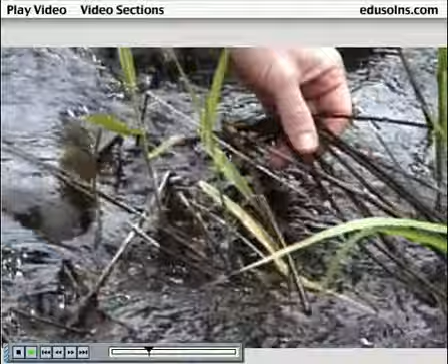Aquatic systems are impacted by inputs from their surroundings. For example, as a forest goes through its annual cycle, it can affect the stream environment by contributing water from storm runoff and spring thaw, soil from erosion during storms, and organic matter from decaying plants, animal excrement, and dead animals. Small amounts of organic matter are healthy for the stream and supply nutrients for primary growth in the stream. These nutrients are the basis for most food chains in an aquatic system.

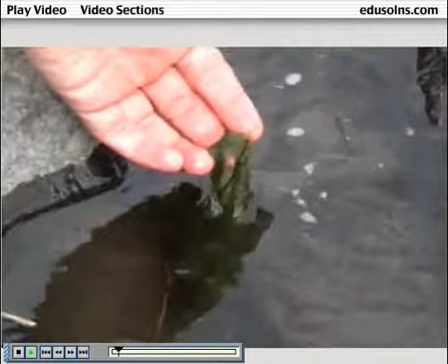When nutrient levels in a stream reach a certain level, growth forms on rocks and tends to make them slimy. In this process, nature is taking dissolved organic matter from the water and turning it into particulate or solid organic matter in the form of bacterial, algal, and fungal cells.

This is the same natural process that we use in sewage treatment plants to process our common household waste. The problem is that if we directly release our sewage waste into streams and rivers, it causes two problems. First, the organic matter is at such a high level that it overwhelms the natural removal processes in the stream. Second, disease organisms present in our waste are transmitted to other users downstream from our sewage release.

Before we can completely understand sewage treatment, we must define a few terms and see how the effectiveness of the sewage treatment plant is measured. Every sewage treatment plant measures several chemical parameters of what comes into the plant, referred to as the influent, and what leaves the plant, referred to as its effluent.

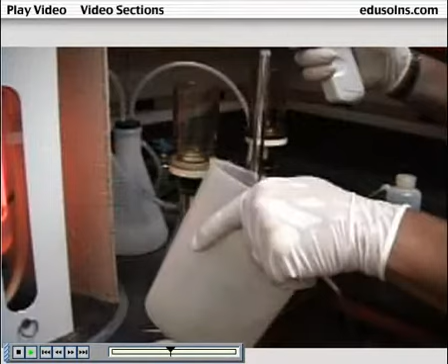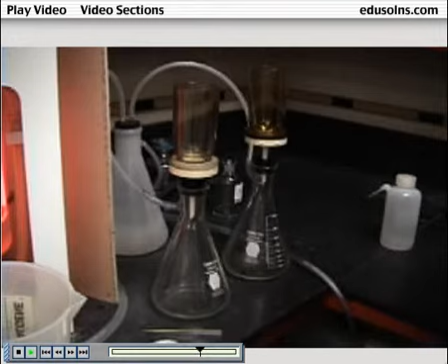From the standpoint of day-to-day operations, it's important to know how much waste is entering the plant. This information helps the plant operator keep the plant operating at its maximum efficiency. From a regulation standpoint, it is important to know how well the treatment plant has removed the organic and bacterial waste. Examples of these chemical measurements include a solids determination, a biochemical oxygen demand test, and a fecal coliform test.

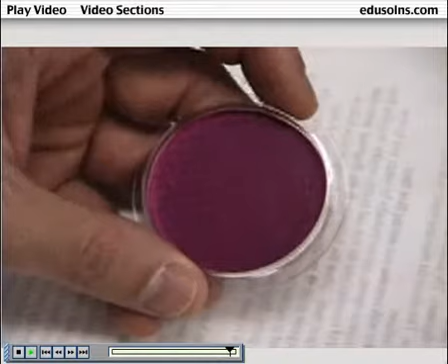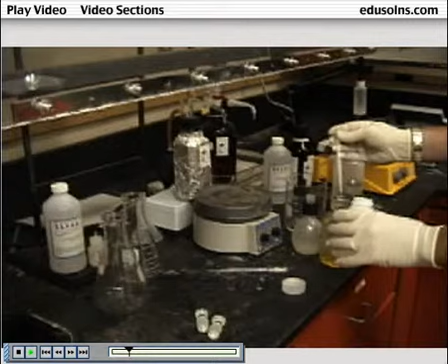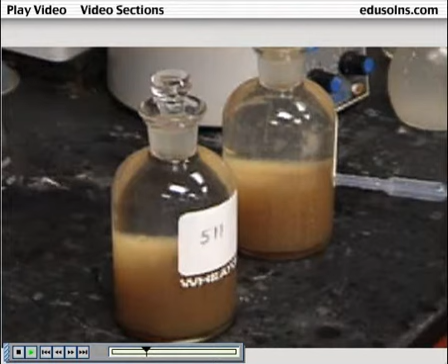One of the most important chemical measurements is the dissolved oxygen concentration. Air-breathing animals have the luxury of having approximately 20% oxygen in the atmosphere. But water can only contain about 8 to 10 parts per million depending on the temperature and amount of organic waste in the water. In percentage terms, water only contains about 0.001%, which is incredibly small as compared to our 20% from the atmosphere.

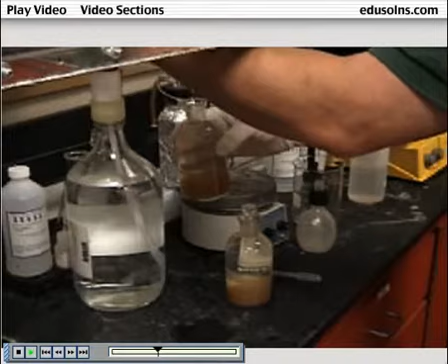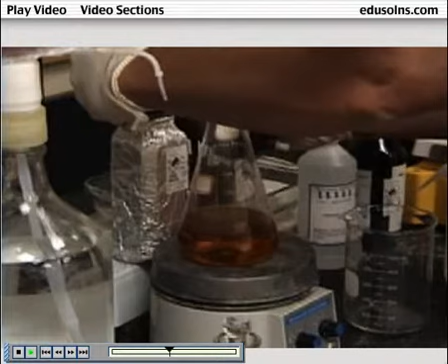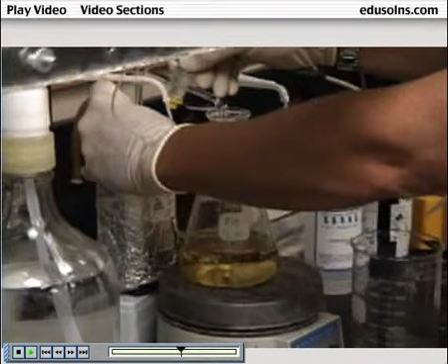When organic waste is released into a water system, microbes in the water use the dissolved oxygen to oxidize the organic waste. You can see that when there are only 10 parts per million oxygen in the water, all of the oxygen can be rapidly consumed. Thus, the main point of a sewage treatment plant is to remove the organic matter to a level that the stream can handle the waste, such that it does not consume all of the oxygen.

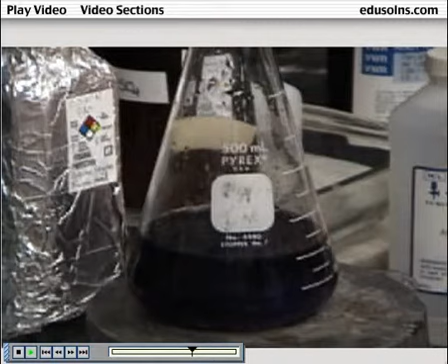This brings us to the term biochemical oxygen demand, referred to as BOD. The BOD is a measure of how much oxygen would be needed by bacteria to completely oxidize the waste. This is determined by placing a small amount of the organic waste in a bottle, measuring the initial dissolved oxygen in the bottle, allowing it to incubate in the dark for 5 days, and measuring the remaining dissolved oxygen. From the initial and final dissolved oxygen measurements, you can calculate the BOD in the waste.

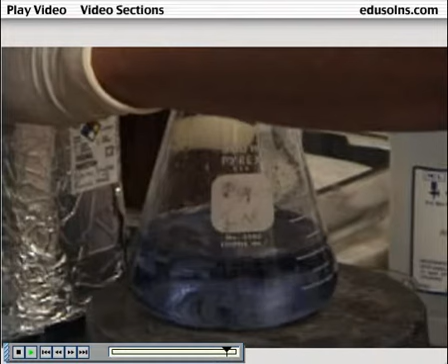Sewage treatment plants measure the influent BOD and the effluent BOD to determine the percent removal or efficiency of the plant. Waste treatment plants vary from city to city, but the basic processes are the same in developed countries. In fact, one prerequisite for being a developed country is to have adequate water and wastewater treatment. These two capabilities are key to fighting disease and providing one's citizens with a healthy environment.

We will illustrate a trickling filter plant and an activated sludge lagoon. First, we will follow the water through the plant. Then we will come back and discuss solids removal.

As you view this video, remember that there are two types of BOD that we are concerned with: BOD in the particulate or solid form, and BOD dissolved in the water. It is also important to note that we remove dissolved BOD by turning it into microbial cells that we can then remove from the water.

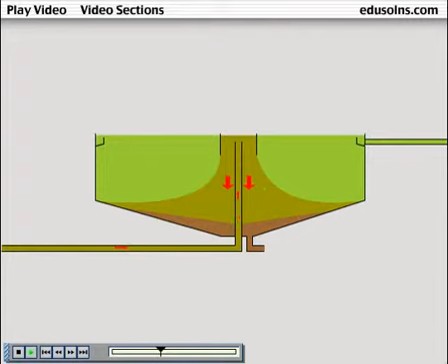Prior to the 1960s, most cities in the United States only performed primary treatment on sewage waste. This basically involved collecting the flow from the sewer into a large tank and letting the solids settle out of the system. The cleaner water flowed over the top of the tank and was released into a nearby stream, but this water still contained approximately 50% of the initial BOD.

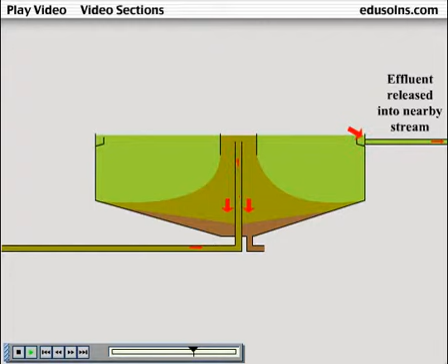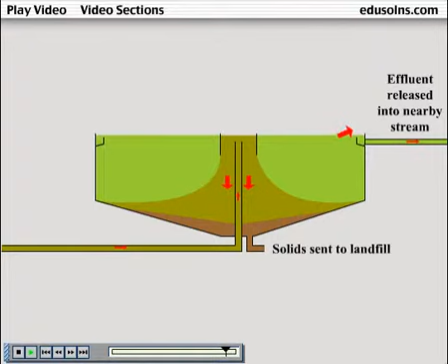Solids collected in the bottom of the tank were disposed of in a landfill. As you can guess, this may have been an inexpensive treatment process, but it was not as effective as we needed and did little to control diseases.

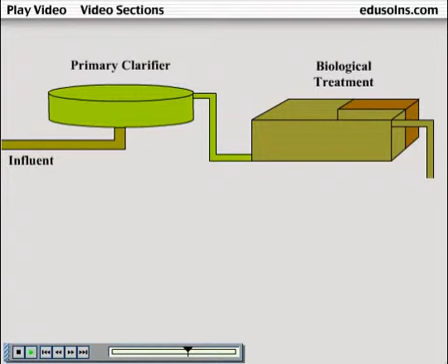In the mid-1960s and 1970s, the federal government started a program to update sewage treatment facilities. This basically involved adding secondary or biological treatment to existing facilities and building completely new facilities for cities without any sewage treatment. After the biological treatment process, another settling tank was added and a chlorination step was added to kill any pathogenic organisms still present in the waste.

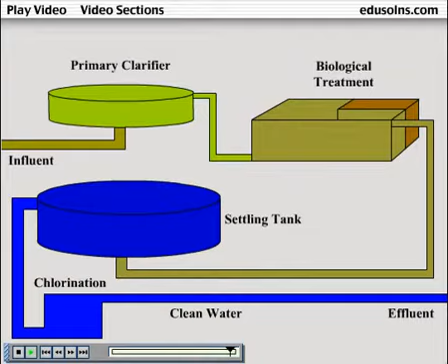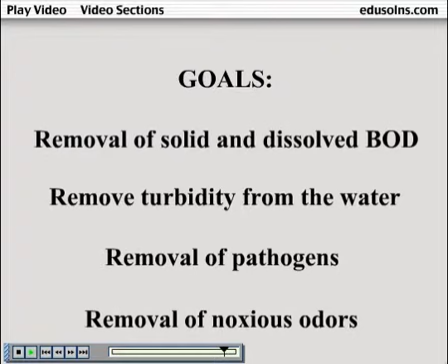This brings us to the major goals of sewage treatment. These goals include the removal of solid waste that can result in BOD to the receiving water. We must also remove any dissolved BOD, since this form of BOD will travel with the water, exit the plant, and result in harm to nearby streams. From a purely visual standpoint, we also want to remove any cloudiness or turbidity from the water. Removal of pathogens is a major goal of the treatment process. And finally, we would like to remove any noxious odors from the waste.

The sewage treatment plant that we will use to illustrate wastewater treatment is located in Walla Walla, Washington. This plant was selected due to its proximity to Whitman College and because of the diversity of treatment processes that the plant has. We will begin our tour by looking at the location of the plant with respect to the city of Walla Walla.

The usual location of municipal treatment plants is downhill from the city. Drinking water plants are usually located uphill from town, which minimizes costs associated with the pumping of treated water. The same economic principles apply to waste treatment plants, which are usually located downhill from the town. This follows the basic principle of water flows downhill.

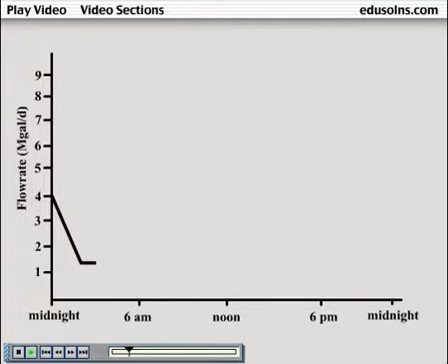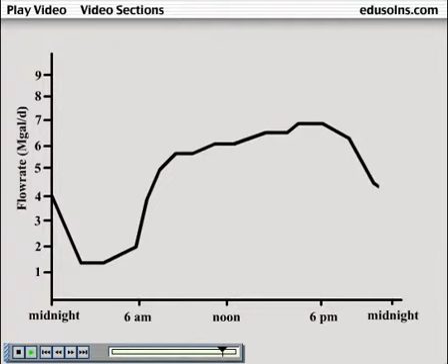Imagine not going to the bathroom or taking a shower for a day. Or imagine not being allowed to go to the bathroom on holiday, or after 5 o'clock in the afternoon. Our point here is the water treatment plants and the sewage treatment plants must operate 24 hours a day, 7 days a week, and 365 days a year. No exceptions. Some systems are automated today, but still the treatment process must continue, uninterrupted. So when you get up in the night to relieve yourself, remember, someone is hard at work at the treatment plant. The figure here shows the daily cycle of water use in a typical city.

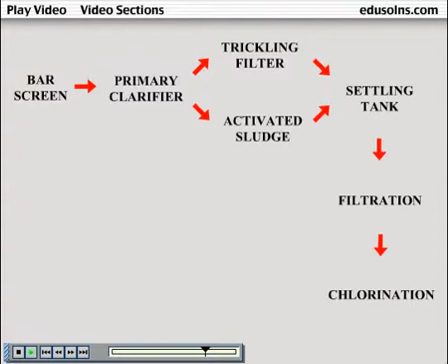Now with this background, we will finally illustrate and describe the basic components of a sewage treatment plant. As we do this, keep two points in mind. First, we will describe one basic system, but will show two different biological treatment processes. Seldom does one treatment plant have both biological treatment processes. Second, we will first follow the flow of water through the treatment plant, then we will come back to the inlet of the plant and explain what happens to the solids entering the plant.

Water enters the plant through a bar screen that removes large objects that may have inadvertently entered the system. These objects would damage pumps and other components of the treatment plant and would likely clog pipes if they were not removed.

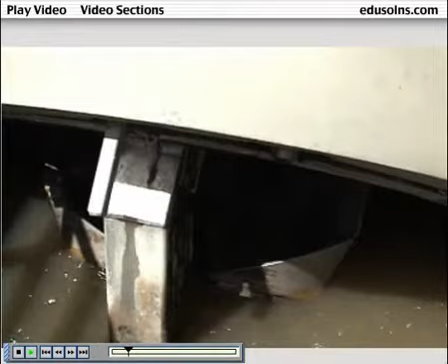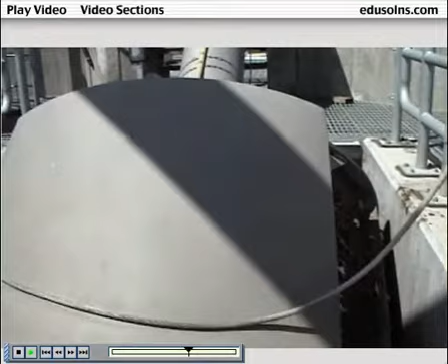Next, the wastewater passes through a microscreen which removes additional large solids such as plastics, cigarette butts, and other solids that will not biodegrade in the treatment plant, but could also damage pumps or clog smaller pipes in the system. Periodically, the microscreen cycles through a cleaning stage which removes solids from the filter. Some treatment plants have an additional comminutor which grinds the solids into smaller pieces. An example of these solids is shown here. These solids do not enter the plant any further, but are disposed of in a sanitary landfill.

After larger solids that could damage the system have been removed, the wastewater flows into a settling tank, referred to as a primary or preliminary clarifier. It is important to remember that BOD enters the plant as solids, which are easily removed and treated, and as dissolved BOD, which is more difficult to remove but relatively easy to treat. Approximately 50% of the BOD entering sewage treatment plants is removed in the primary clarifier.

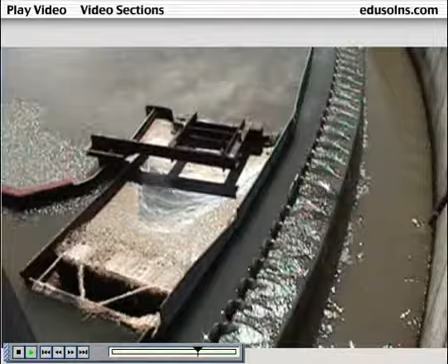Water enters the clarifier in the center. As the water flows to the sides of the tank where it is collected, solids settle to the bottom while oils and fats, referred to as scum, are collected by the rotating arm and are added to the solid waste. To understand how the clarifier works, we will identify the components of an empty clarifier.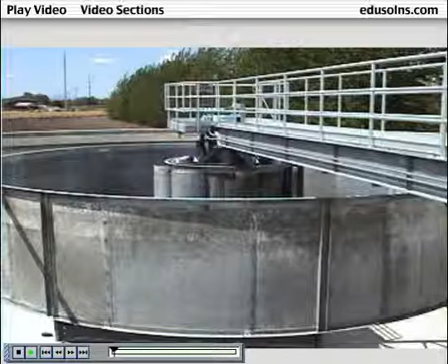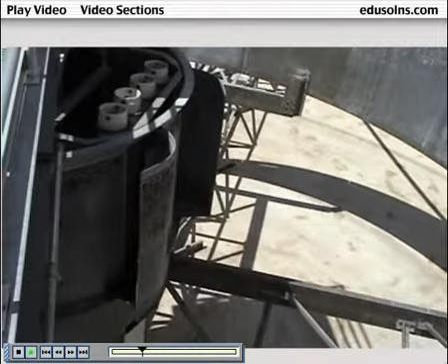The wastewater enters the clarifier in the center, just below the surface but inside the center well. The baffles shown here allow the water to gently enter the clarifier and do not allow the water to rapidly leave the center well. These baffles and center well enhance the settling of solids to the bottom.

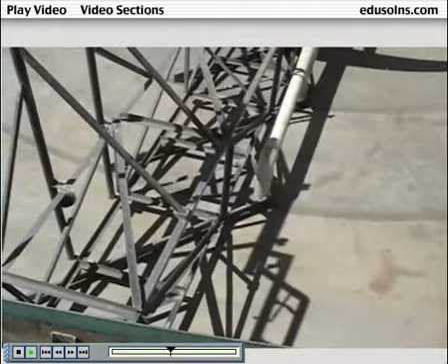In the previous video, you observed the operation of the scum collector along the surface of the water. This is shown here in the empty clarifier. As solids are collected on the bottom of the clarifier, a solids rake moves in unison with the scum collector and drags the settled solids to the center of the tank for collection. An animation of a clarifier will help illustrate its operation.

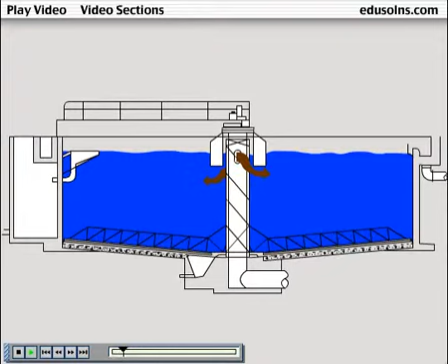First, note the turbid water entering the center of the tank. As solids settle to the bottom, the rotating rake draws them toward the center. The tank also has a conical bottom, which aids in solids collection.

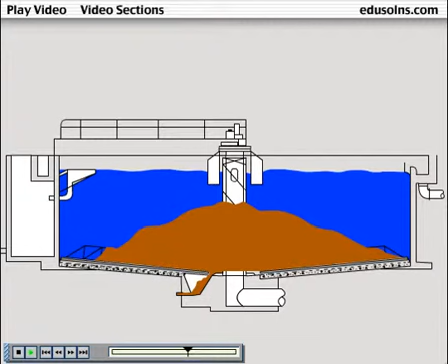As solids collect in the center, they exit through the floor and are pumped to the solids digester we will discuss later. Also note the rotating arm at the surface of the water that collects oils and floating debris. These solids are also added to the solids digester.

As you have seen, there's a lot at work underneath the surface of a clarifier. The important point to remember is that the primary clarifier removes solid BOD that constitutes approximately 50% of the BOD entering the treatment plant. The remainder of the BOD is removed in the biological treatment unit shown next.

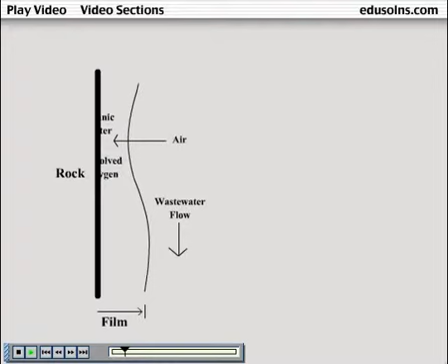Before we view the entire trickling filter, we will first look at the chemical reactions and biological growth on an individual rock. The growth you saw on the active trickling filter did not occur overnight.

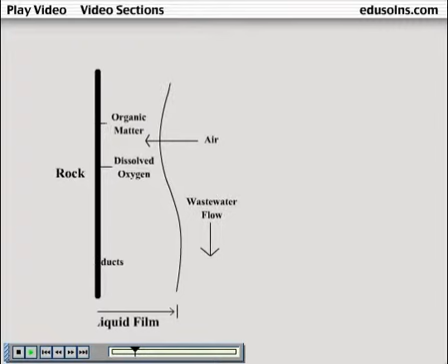In fact, it takes around 30 days to establish a stable, productive microbial growth on these rocks. But the term stable is used in a relative sense, because microbial mats of growth are constantly being released and growing back. The animation here also illustrates the chemical reactions taking place on each microbial mat.

As water is sprayed on the clean rock, growth starts, and it is initially all aerobic growth. This means only oxygen-using microbes are actively growing.

In this case, the microbial mat is thin, which allows nutrients in the waste and oxygen to migrate all the way to the rock, and it also allows microbial waste products such as carbon dioxide to exit the system.

As the microbial mat grows, it eventually becomes so thick that oxygen cannot make it all the way to the rock. Initially, a facultative area is created, which means that a small amount of oxygen makes it all the way in. This change in oxygen concentration allows a new group of microorganisms to establish a colony.

As the mat grows even thicker, an anaerobic zone, which is an area without oxygen, is created next to the rock. Eventually the mat becomes so thick and heavy that it falls off, and a new mat is started.

But remember, this is the goal of sewage treatment systems: to turn dissolved BOD into microbial cells that we can easily separate from the water.

The microbial colonies released from the trickling filter are easily collected in another clarifier, and clear, clean water is the result. Now that we have seen what happens on each rock in the trickling filter, let's take a look at the entire system.

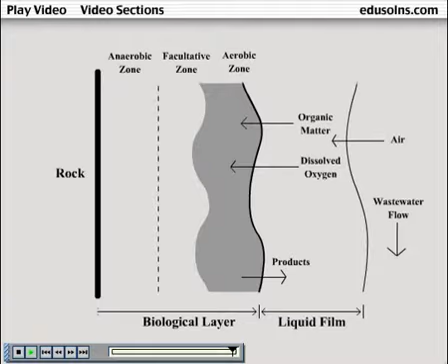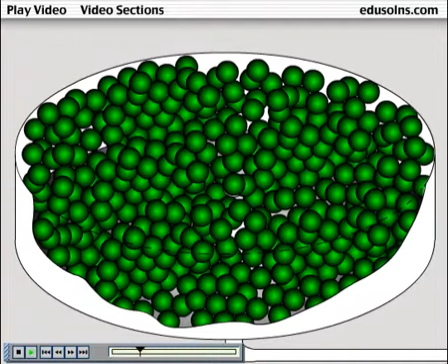To understand exactly how a trickling filter works, we must look at a cross-section of the tank. As you can see, trickling filter tanks are circular in shape, which allows the spinning application arms to evenly spread the wastewater across the entire bed of rocks.

Water enters the tank through the center pipe and flows outward along the arms as it is sprayed onto the bed. The water flows downward through the bed of rocks. BOD is drawn into the microbial mats, and the treated water is collected in the bottom of the tank.

The treated water, and any microbial mats that have been released, travel next to the clarifier, where the solids are allowed to settle out.

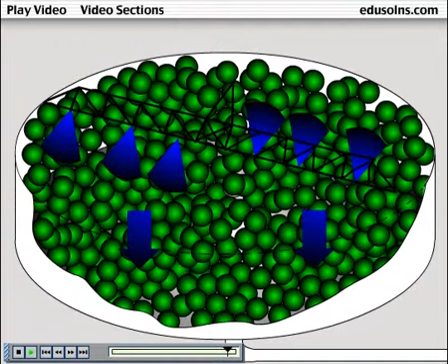The trickling filter was used as the biological treatment in wastewater plants for decades. It served its purpose well, but suffered from a few limitations, and a more stable system, the activated sludge lagoon, was developed. The limitations of the trickling filters are: they are susceptible to shock loads of toxic chemicals.

For example, many sewage treatment plants today also serve food processing plants and industrial processes. If one of these plants accidentally releases toxins to the system, it will kill most or all of the microbial colonies in the trickling filter.

Without these microbial colonies, the treatment plant is essentially shut down and the sewage would flow directly into the receiving streams. Although trickling filter plants are reasonably effective at removing dissolved BOD, the newer activated sludge lagoons are more effective.

Finally, in cold climates, the trickling filter unit must be covered to avoid freezing in the winter months. Settling properties of the solids leaving the trickling filter are not as good as solids from the activated sludge process.

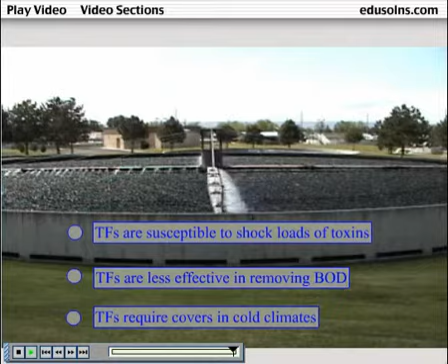Now we will look at the alternative to the trickling filter, which is the activated sludge lagoon. Activated sludge lagoons come in a variety of shapes and sizes. Most are rectangular, but more recent ones are semicircular in shape and divided into two units.

The system that we will show is in the City of Walla Walla treatment plant. The right side of the lagoon is where extra or recycled microbial cells are conditioned and microbe selection occurs. We'll look at a close-up of this tank in a moment.

As more microbial cells are needed, they are added to the left side of the system, which is vigorously mixed. This is where dissolved BOD is taken up by the microbial cells and turned into cell mass and more microbial cells. Now let's look at the activated sludge lagoon a little closer.

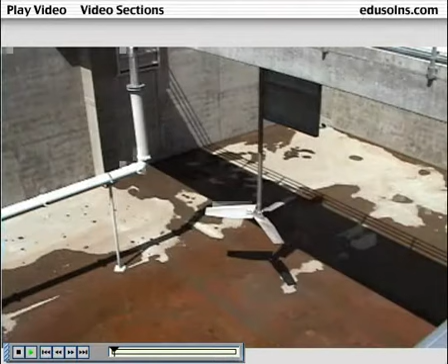We are looking at an empty holding tank, which is also referred to as the starving tank. This is where extra or recycled microbes from the second half of the activated sludge lagoon are stored until needed. These microbes are stored in high numbers in a thick cell suspension.

First, notice the mixer blade in the middle of the tank. Now we'll look at the full tank. The cells are mixed and gently aerated to just keep them alive. The simple fact is, these microbes are starving.

We have found that if we keep these microbes really hungry, when we mix them with fresh wastewater and mix them vigorously in the second half of the activated sludge lagoon, they rapidly take up the dissolved BOD from the water. The point of this is that the wastewater only needs to spend a short time in the second part of the system to remove the dissolved BOD.

The second part of the tank shown here is divided into two identical cells. Both are violently mixed with the blue blades shown in the middle of the tank and by the white aerator that is just visible underneath the concrete slab.

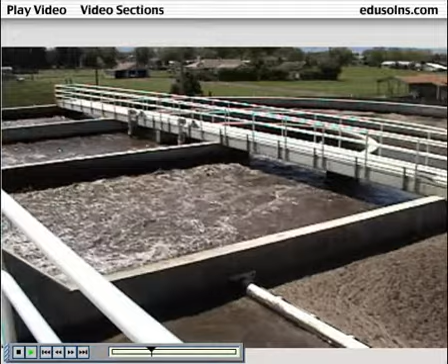As you can see, this half of the tank is well mixed in order to supply lots of oxygen to the microbes. Unlike the trickling filter unit, this is a completely aerobic process. The cells must stay suspended and be supplied with the needed oxygen to take up as much of the BOD in the short time.

As new cells and fresh wastewater enter, the system is mixed and circulated. The hungry microbes rapidly take up the dissolved BOD and incorporate it into their systems. As the turbulent mixture passes the exit, a small portion of the liquid is removed and sent to the clarifier, shown here in the background.

Now we will return to the basic system. Remember that usually only a trickling filter or an activated sludge lagoon are used for the biological treatment unit. Rarely does one treatment plant have and use both units.

After the biological treatment, a clarifier is needed to allow the solids, which are actually microbial cells, to settle. The tank shown here is identical to the one we saw for the primary clarifier.

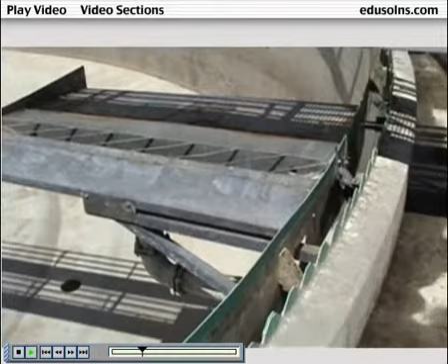The only difference is that the clarifiers positioned after the biological treatment unit are larger than the one used for the primary clarifier. The larger size here is needed because the particles that we are trying to separate from the water are smaller and require a longer retention time in the tank to settle and produce clear water.

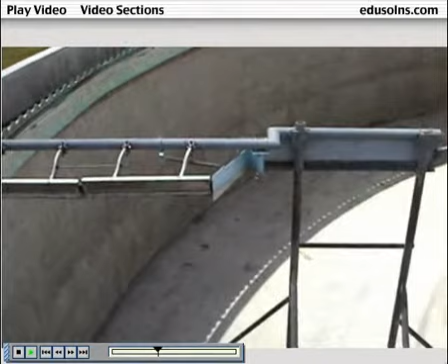Again, let's identify the important parts. As in the primary clarifier, we have two rotating arms, one along the surface of the water to isolate and collect any floating solids, and one along the bottom to direct the settled solids to the center of the tank for collection.

The water from the biological unit enters the center of the tank. The baffles allow the water to gently enter, and the center well keeps the water from rushing to the exit weirs positioned along the outer wall.

The large hole in the bottom of the tank is where the settled solids exit. These solids are now referred to as sludge. Let's look again at a full tank.

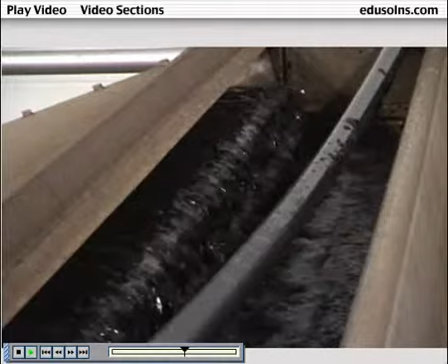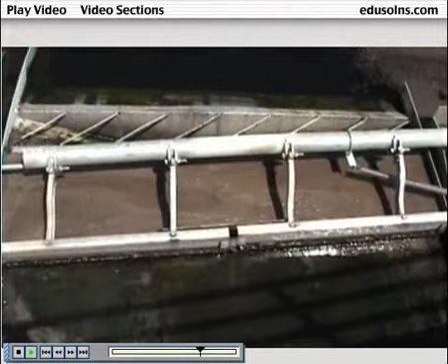Microbes entering the tank have just received a large helping of food. Yes, food. It is difficult to think of it, but our wastewater is someone else's food. At this point, the surface of the microbe changes and allows them to stick together. This is good for us, since larger particles will settle faster.

Unfortunately, they do not settle quite fast enough, and we use two settling basins, one after the other, to allow most of the microbes to settle out.

Solids collected in both clarifiers are sent back to the holding tank in the activated sludge lagoon, or are processed as solid waste discussed later. Water exiting the second clarifier is very clear, but not quite clear enough to exit the plant.

To clarify the water further, we use a filter bed. This final step is referred to as polishing the water. Although the water exiting the clarifiers is considerably clear, most treatment plants are required to filter their treated water prior to releasing it to a stream.

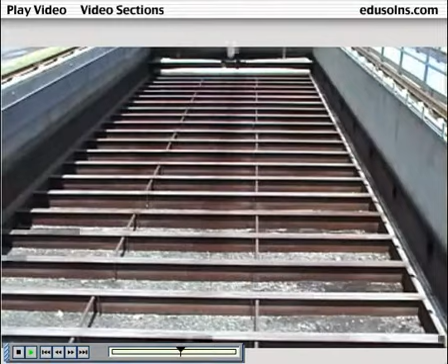The most economical way to filter large volumes of water is with the sand filter bed. Some plants use sand as the filter medium, while others use fine coal, and some use a mixture of sand and coal. The dark surface of the one shown here is obviously coal. The purpose of using fine-grained sand and coal is to remove the very small microbial particles that may escape the clarifiers.

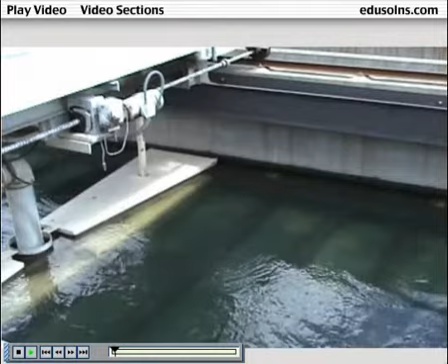Water exiting the clarifier enters the filter bed via ports in the side of the center wall. The water surface rises until the pressure of the water pushes the water through the filter bed downward. Particles in the water are filtered out based on size or by impaction onto a grain of sand or coal. Water exiting the sand filter is very clear and meets state and federal standards for treated water quality.

However, filter beds cannot operate indefinitely. They need to be cleaned from time to time.

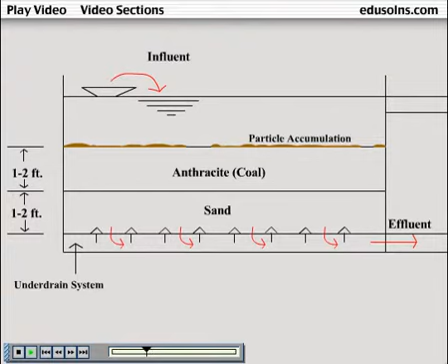As seen here, water enters an individual filter unit from the surface. The water, containing particles, passes through the filter bed, leaving its particles behind, and clear water exits the bed. However, as more and more particles are collected by the bed, the water level and pressure increases and would continue to increase until the bed overflowed.

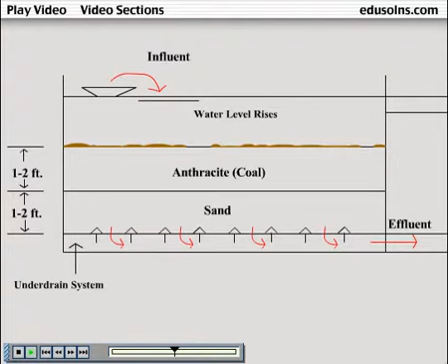To prevent overflowing, individual filter units are periodically washed to remove the collected particles. This process is referred to as backwashing. The name is explained by the way the filter bed is cleaned.

The water flow is reversed in the system, and clean water is pumped from the bottom to the top of the filter. The surface of the filter bed, which contains the majority of the particles, is also agitated. This washing process dislodges trapped particles which are washed out of the system. Wash water is placed back in the plant for treatment.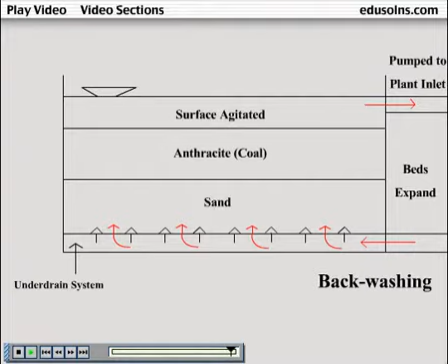The filter bed is usually the final treatment process for turbidity in wastewater plants. The combination of these processes produces clear water that has minimal BOD and very few pathogen organisms. The few remaining microbial organisms are treated with a disinfectant before the water exits the plant.

There are a number of disinfection techniques used to treat wastewater effluent. These include ozone, which is primarily used in Europe but is being considered for use in the United States. Other options include high-intensity UV light, chlorine gas, and sodium hypochlorite.

High-intensity UV light is a relatively new development, and in combination with ozone, will probably replace chlorine-based disinfection approaches in the near future. But for now, most wastewater treatment plants use some form of chlorine. Chlorine gas is relatively dangerous to store and use, but is relatively easy to use to treat wastewater.

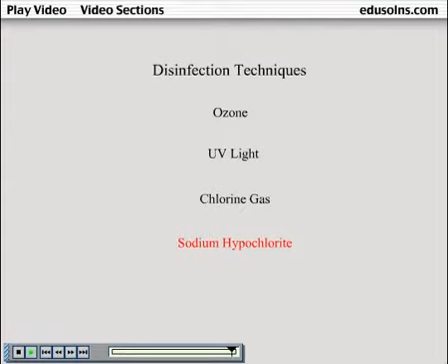We will illustrate the generation of hypochlorite by an electrolytic process. On-site generation of your disinfectant eliminates the need to transport and store dangerous gases, but still provides a more than adequate treatment system. The system shown here uses electricity to transform a simple sodium chloride solution, basically a table salt solution, into hydrogen gas and hypochlorite.

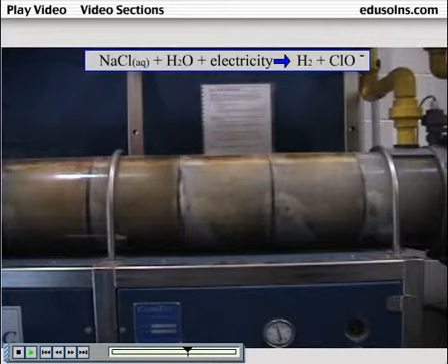Hypochlorite, the ClO- shown on the screen, is the same disinfection agent obtained when you use chlorine gas or any chlorine-based disinfectant. In small doses, this compound is relatively harmless to humans, but is very effective in killing microbes.

Prior to the release of the water to a stream, most states require that any excess oxidized chlorine compounds be treated to make them harmless to wildlife in the stream. This can easily be done using sodium bisulfite or sulfur dioxide gas that renders the hypochlorite harmless.

So, we've covered a lot of material. Before we go on to the removal and treatment of solids in the wastewater facility, let's quickly review the flow of water through the system.

Water enters the plant through a series of screens that remove large objects from the wastewater that could damage components of the treatment plant. Next, solids are separated from the water in a primary clarifier. The solids removed here typically account for 50% of the BOD in the system.

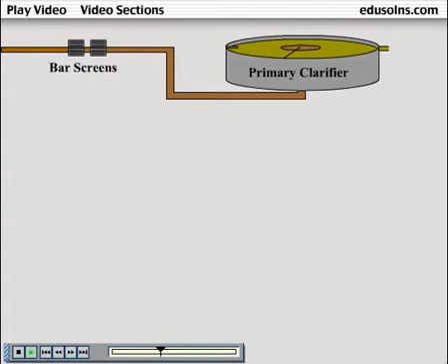The water exiting the primary clarifier next enters a biological treatment unit. This can be a trickling filter or an activated sludge lagoon. Again, the purpose of the biological treatment unit is to convert dissolved BOD into microbial cells that can be separated out in the next step.

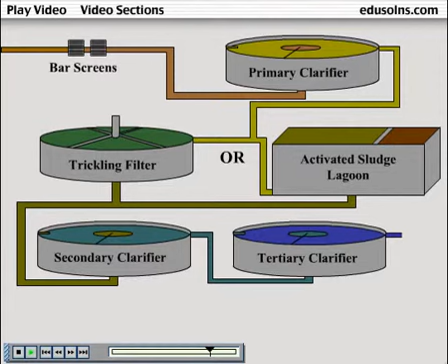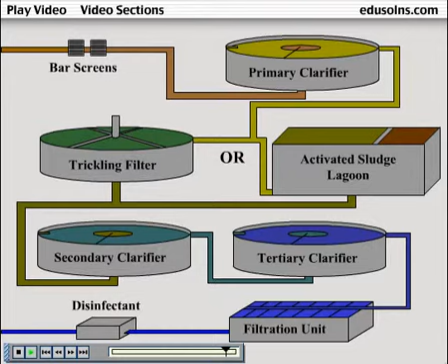Water exiting the biological treatment unit goes to a series of clarifiers where the solids are collected and clean water goes to the filtration unit. Here, the final solids remaining in the water are removed. Finally, the water is treated with a disinfectant to kill any pathogens that may remain in the water.

We will now look at where biodegradable solids are collected in the system, using the same figure from the previous explanation. The first solids come from the primary clarifier near the inlet of the plant. Next, solids are generated in both biological treatment systems and are collected in the two clarifiers located just after them.

Most of the solids collected from the activated sludge lagoon are recycled back into the holding tank. Occasionally, some of these solids are sent to solids treatment. All of the solids mentioned have not been processed very efficiently, and further processing would yield very noxious odors. Thus, we now process these solids in the anaerobic digester shown here. This allows the microbial solids to be degraded into organic acids and then into methane.

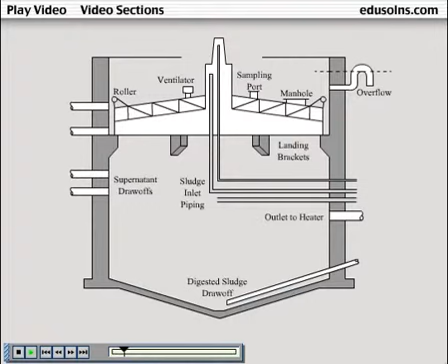The anaerobic digester is simple to operate, and we basically let nature take its own course. A new set of microbes take the rich and healthy microbes from the solids collection and digest them further. The top of these tanks is usually designed to expand to account for volume changes without letting in large amounts of atmospheric gases.

Digestion times in the anaerobic digester are typically one to two months, which is much longer than the few hours of retention time of water in the treatment plant.

Gases generated in the anaerobic digester are collected out of the top of the digester and stored in a holding tank. These gases are used to heat the anaerobic digester and are pumped back through the anaerobic system to keep the digesters mixed. The reason for heating the digesters is simple.

Warming the microbes allows them to digest the solids faster and shortens the detention time in the anaerobic digester. And the faster the digestion time, the smaller the volume the tank needs to be. Plus, we eliminate noxious odors in the form of hydrogen sulfide and methane.

After the solids have been digested to completion, they are ready for processing and disposal. First, they are sent to a holding tank where they are mixed. The solids still contain considerable water, and there is no need to transport the additional weight of the water.

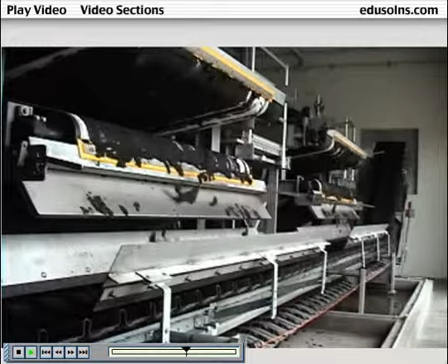A variety of disposal options are now available. Some waste treatment plants compost their waste and give it away to greenhouses or local residents. At the city of Walla Walla, we give our solid waste to local farmers who spread the organic and nutrient-rich waste onto their fields to improve crop yields.

One of our greatest environmental success stories is the removal of sewage waste from streams and lakes. This has been accomplished by the same tools nature uses, but we've incorporated them into confined and highly controlled engineered systems. To repeat our goals: first, remove dissolved and solid BOD from the water; second, remove pathogens from our wastewater; and third, reduce noxious odors from the waste.

To illustrate the overwhelming success of sewage treatment plants, we will look at the dissolved oxygen levels in a stream if it were to receive the untreated sewage waste from the city of Walla Walla. Remember that natural streams such as this one normally have high levels of dissolved oxygen, typically ranging from 8 to 12 milligrams per liter, depending on the temperature of the water.